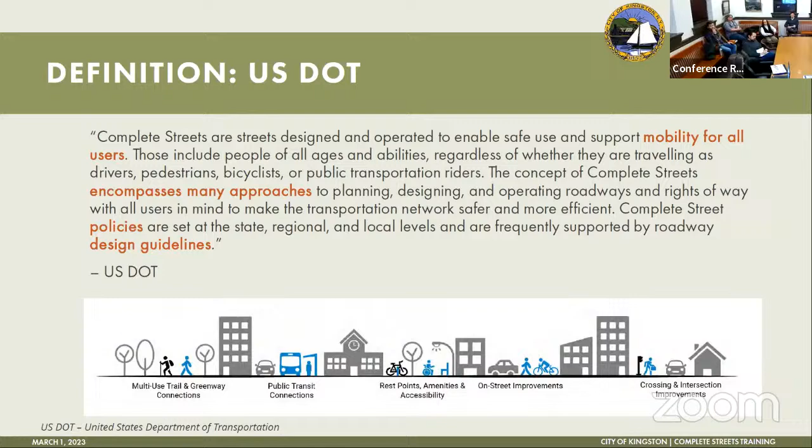Another definition is the Smart Growth America, which really coined the term complete street. So again, very similar to the US DOT's, but I just want to make sure we're all on the same page of how we are defining this. So complete streets is an approach to planning, designing, and building streets that enables safe access for all users, including pedestrians, bicyclists, motorists, and transit riders of all ages and abilities.

This approach also emphasizes the needs of those who have experienced systemic underinvestment, or those whose needs have not been met through a traditional transportation approach, such as older adults, people living with disabilities, people who don't have access to vehicles, and Black, Native, and Hispanic or Latino communities.

And they also go on further to define what an incomplete street is, which is the result of a process that fails to consider the needs of all people and outdated measures of what makes a street successful. And in terms of all people, it considers the needs across the entire spectrum of demographics, age, sex, etc., mobility levels, and mode of transportation.

So again, the image that we're seeing is just a traditional street. And as this presentation unfolds, it's how do we redefine basically that edge of pavement situation to accommodate more than just cars, more than just vehicles. So again, looking at traditionally, we're looking at the roadway in this image, where the car and the bus are shown. That's typically what we looked at of how to get people around. So how do we transform that to look at all users?

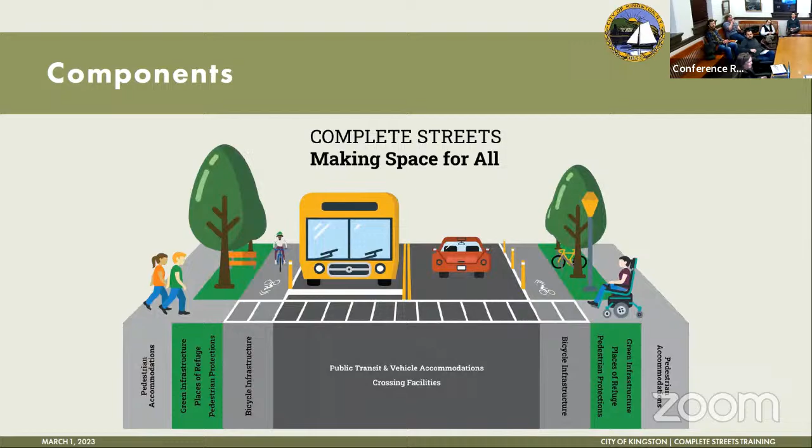The overlapping uses is where the conflict arises. And getting any sort of accidents or fatalities down to the minimum or to zero is obviously the goal. And so what can we do to make these changes in design for all users?

So the individual components for complete streets, in terms of pedestrian accommodations, we're looking to provide sidewalks and/or multi-use paths for pedestrians. We're looking to provide curb ramps that allow them to go from the elevation of a sidewalk down to cross at roadway level to then back up to the sidewalk. And then crosswalks and crossing signals for pedestrians to get across where vehicles are driving.

For bicycles, we're looking at, again, bike lanes. Whether it's on road, or separating them and having them off road on a shared use path, and/or separated by a buffer on the actual roadway where the vehicles are traveling. That could be, again, bike lanes, which are single one-way traffic on either side of the street, or a cycle track, which is two-way traffic on one side of the street.

Vehicles themselves is looking at traffic calming techniques, narrowing the travel lanes, looking at providing bus lanes and bus stops and bus loading zones for public transportation, looking at on-street parking and flexible curb space for vehicles, and then again, looking at possible road diets and reducing the number of vehicle travel lanes.

So a lot of understanding what complete streets work for on any given street or situation. Traffic studies are required to understand how the roads are currently being used by vehicles, and is it possible to reduce a lane. So these are not just solutions that you can just overlay onto any roadway. There's a lot of understanding how the roads are currently being used and what the additional desired uses are.

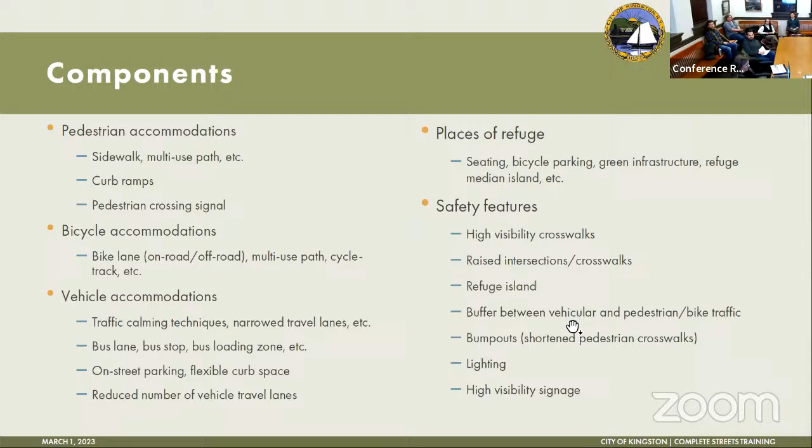So the question is, why complete streets? Why can't we just go on as we are? Bikes can use the roads with cars. People can walk as they want to. But as we've seen every year, people are wanting to walk more. They're wanting to commute more. COVID really increased this a lot as well. People were out more and trying to walk and get places.

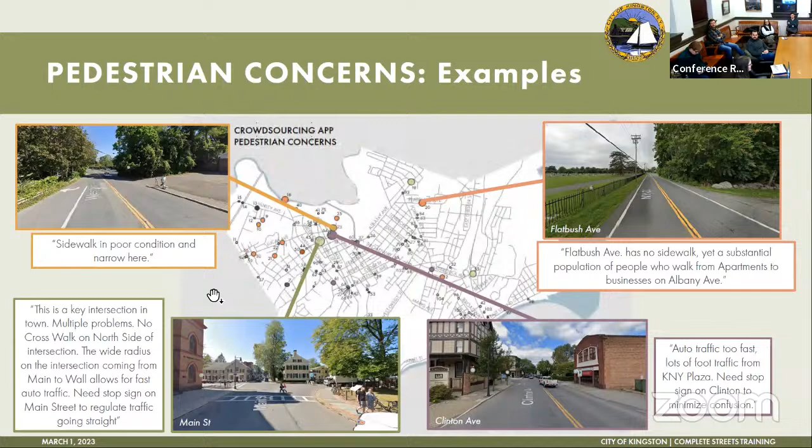And then looking at the bicycle concerns, again, you can see that they are really scattered all throughout the city. The larger size of the dot means there are more votes or comments on any given area. And as you can see, it's just the perceptions, and people are putting out their words of what it feels like to bike in Kingston.

Some anecdotal specific concerns were noted on Washington Ave: consider aligning the intersection and signalizing, considering the trail and potential to complete the trail to Plaza and Midtown Linear Park. Also on Washington Ave, 2 lanes of traffic and lack of shoulder make this section difficult for cycling.

On Albany Ave, the sewer grates, as you can see in this photo, in line of travel and shoulder, are difficult to avoid on a bicycle when being overtaken by 2 lanes of traffic.

On Schwenk Drive, the road is too big and fast for what it supports. Consider dieting the road, with on-street parking with extra capacity. As you can see, even just the residents of Kingston already understand the language of complete streets and the terminology of understanding what they'd like to see within Kingston.

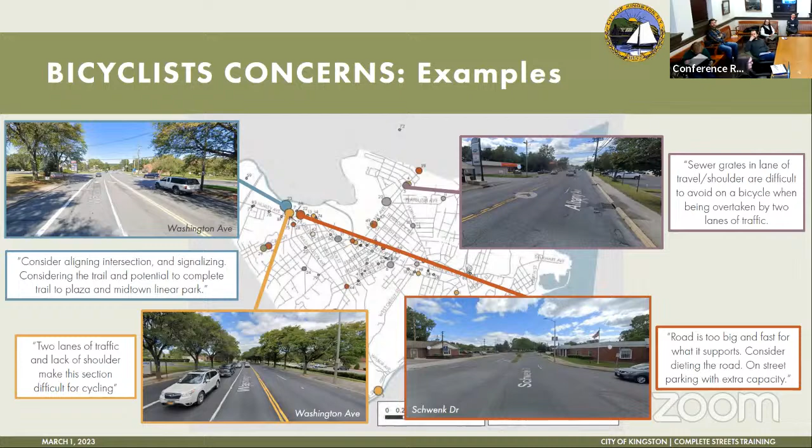The benefits of complete streets really speak to everything we've already been talking about: the more we can separate these overlapping uses, it leads to a reduction in motor vehicle related crashes and a reduction of pedestrian risk while walking around the city. In addition, it reduces the bicyclist risk when well-designed bike infrastructure is included, to the greatest extent possible, separating it from vehicular traffic.

And then really promoting walking and biking—like a field of dreams, build it and they will come. Good sidewalks, good bike lanes is going to increase people walking and biking. So 43% of people reporting a place to walk were significantly more likely to meet regular physical activity recommendations.

Kingston is not alone. Right now, over 1,600 cities across the US, counties, and regional planning agencies have adopted a formal complete streets policy. So this is what a lot of communities are trying to do to support the multiple uses on their roadways.

So now how does a community make this happen? The New York State DOT identifies 4 best practices that can be implemented in projects to support the complete streets principle that we've been talking about. These best practices were identified through stakeholder feedback.

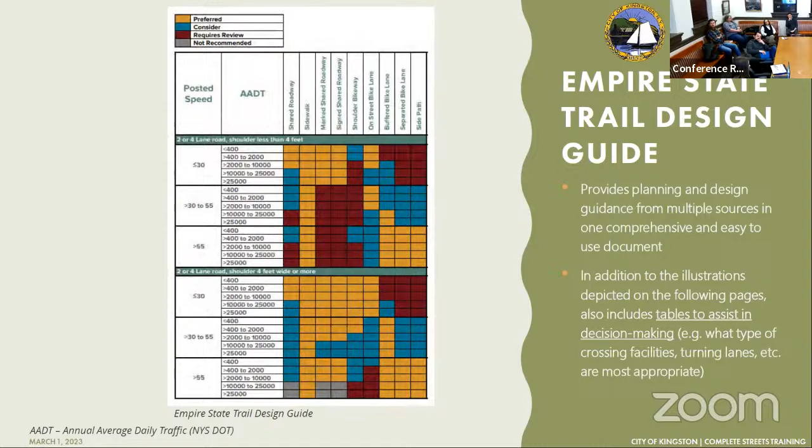This is the Empire State Trail Design Guide, looking at annual average daily traffic. This again goes into the type of road we're looking at and what the posted speed limit is. Then you can look at what they're recommending with respect to a shared roadway or a sidewalk. All these guidelines are out there, and you could look at any given street within Kingston and refer to these design guides to see what is recommended and what the possibilities are to help with decision making.

These are just some slides from the Empire State Trail Design Guide to help you understand all these different conditions. There's not one solution that fits everything. You can see these are recommended only for low traffic residential areas, because our goal is to separate bike and car usage—but if it's a rarely traveled road, maybe there's an opportunity if there isn't enough room to actually separate the uses. It allows that to happen on corridors with very low traffic.

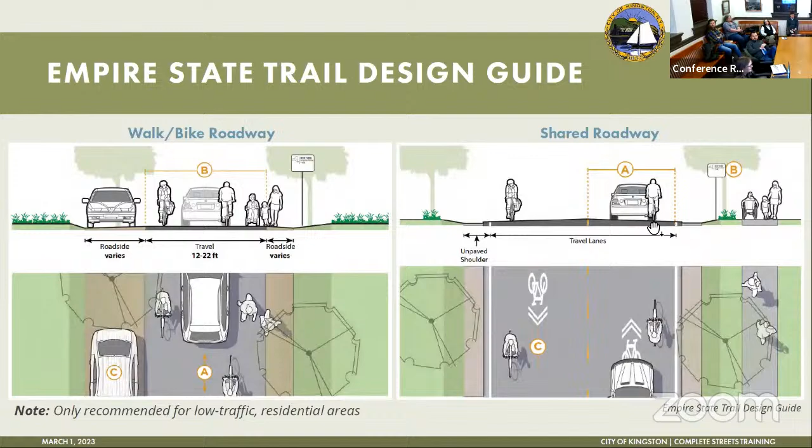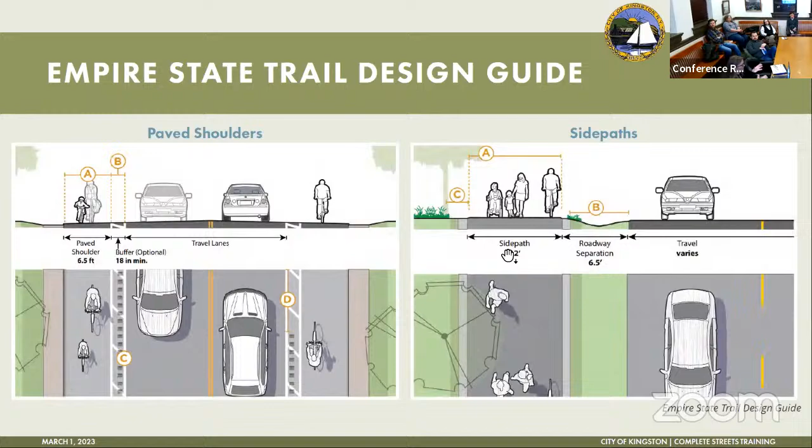A shared roadway isn't the starting point, but depending on the traffic, it is an option. Paved shoulders are another option—can we start getting a buffer, can we start separating the uses? Looking at side paths if we have that opportunity. Again, these design guides take you through and let you look at the widths and how to lay things out.

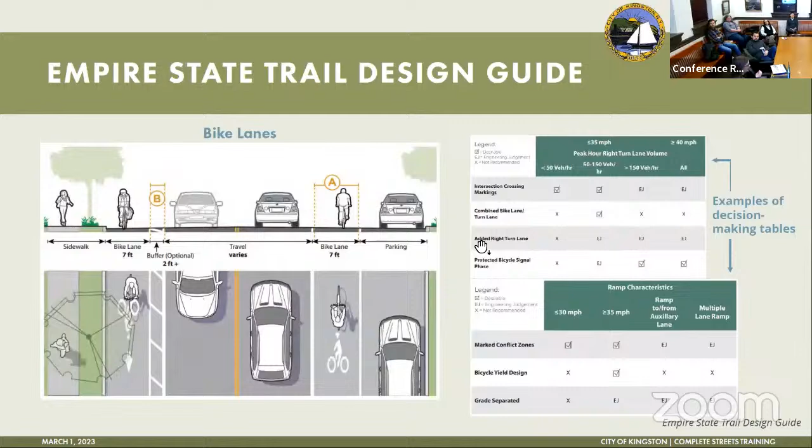Same thing here—all these charts showing peak hour right turn volume, looking at the breakdown of specific roads, because every road in Kingston isn't going to have the same recommended way to get bike traffic and pedestrian traffic on it. On-street parking might be something that's required. So again, all these different things are laid out for you—you don't have to reinvent it, just figure out what the options are.

This is looking again at bike lanes, single direction on either side of the roadway, where the bike lane travels in the same direction as the car with a separation of at least 3 feet. Or do you do a two-way cycle track that's separated from the vehicles, where the bikes all travel together but the pedestrians are separate from the bicycles?

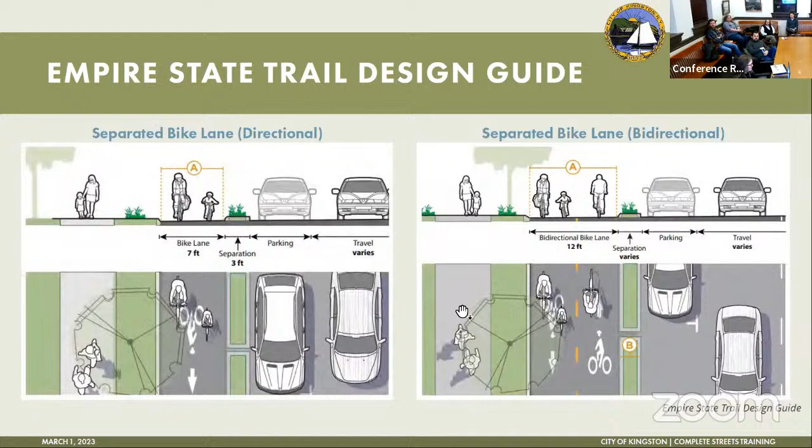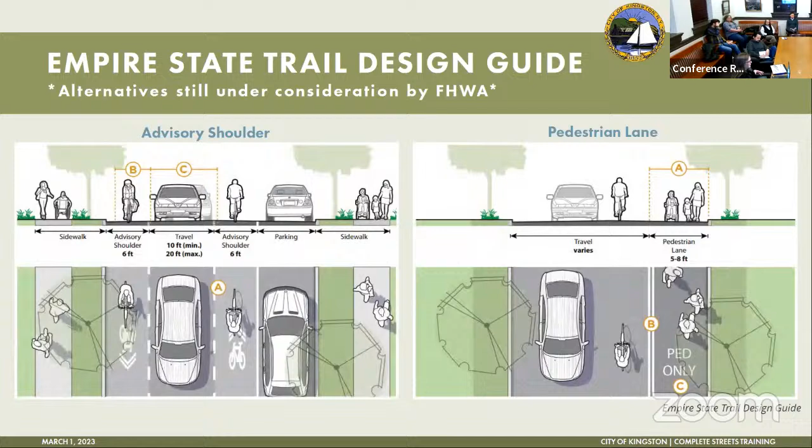Just a couple more alternatives that are currently being considered—these haven't been approved yet, but people are always continuing to think about how best to design this. Unique situations keep coming up, and a solution that's already out there might not work, so the question becomes what's another solution that could work and make things safer.

So let's look at some case studies now, just to make it more specific, and we'll start with some in Kingston, which I'm assuming most of you are familiar with. This is Hurley Ave, which was completed in 2020. The bottom left shows what the conditions used to be, and this is what the current conditions are after incorporating bike lanes.

The starting place on all of these complete streets designs is really looking at the existing pavement width. Anytime you remove or replace a curb, the costs increase a lot. So the starting place is always what can I do curb to curb, and what are my options? Can I get bike lanes in? There are times where, of course, you're going to have to take up a curb and widen things as needed, but the starting place is what can we do with what we have, and restriping is what we'll be focusing on.

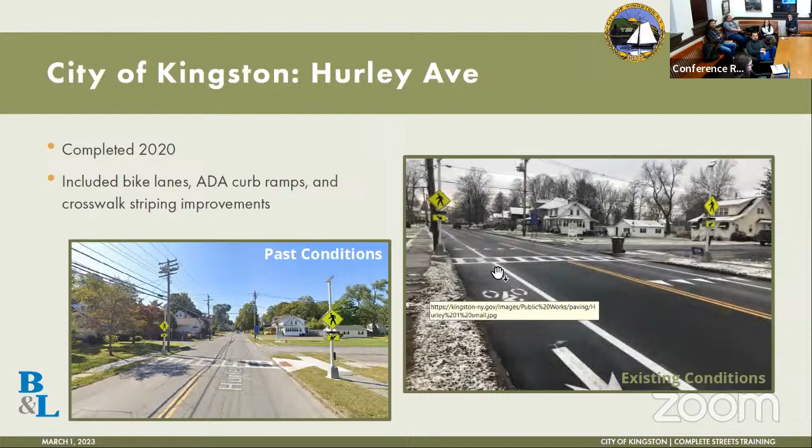Keeping the curb lines as they were, we're able to restripe and get bike lanes in by reducing the travel lane widths of Hurley Ave. This has the pedestrian crossing, a mid-block crossing, which is something enforcement and education is huge on because it's not at an intersection, and getting drivers to understand that a pedestrian in a crosswalk takes precedent. As you can see, the sidewalks here remained existing and stayed, and new curb ramps came in just for the crossing.

This is Broadway, which continues to be developed. This section is St. James Street to Grand Street, which included new ADA compliant sidewalks, repaving of the road, which allowed reconfiguration of the lanes, adding in bike lanes. They synchronized traffic lights, added new signage, incorporated green infrastructure, benches, trash and recycling cans, bike racks, and parking kiosks.

Synchronizing traffic lights is also another component of complete streets to assist with those overlapping areas and intersections, ensuring safe, enough time for pedestrians to cross safely, and enough understanding of how bicyclists will be getting through an intersection.

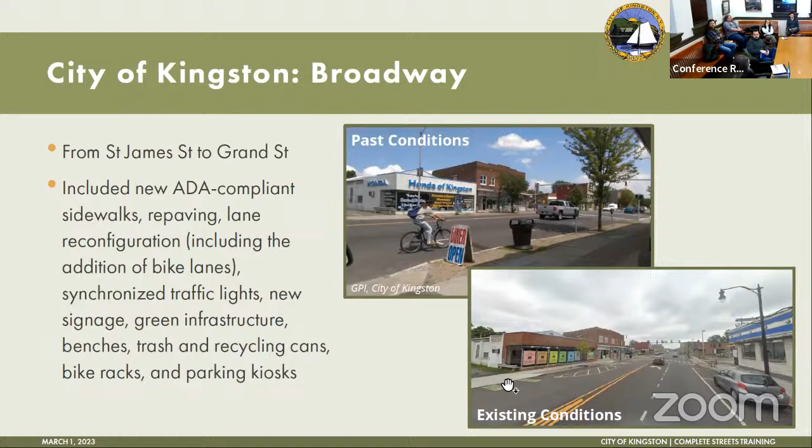With a cycle track, when the flow of bike traffic is on one side of the street, you do need to incorporate signage for the bicyclists so that they are stopping at intersections as well and following the same rules of the law that the vehicles are.

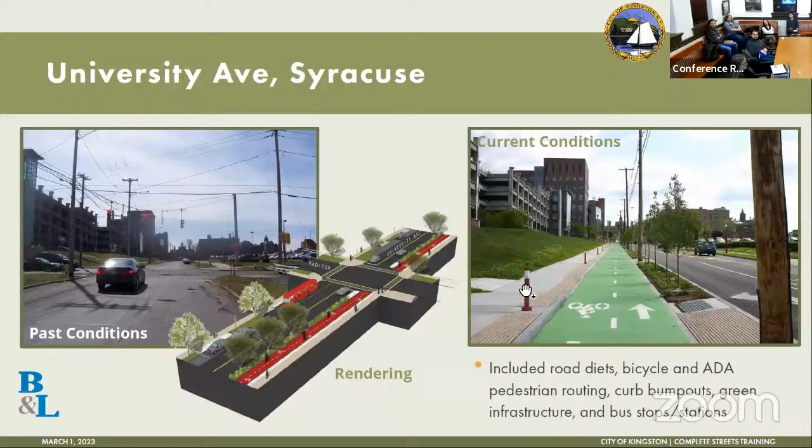Another thing to note here is for buffers, there are multiple ways to do that. This is a planted buffer, but also where there's just pavement, there's a change in the pavement texture so people are aware underfoot that things are changing. Vertical bollards also provide a visual separation, a visual buffer for the separation of uses.

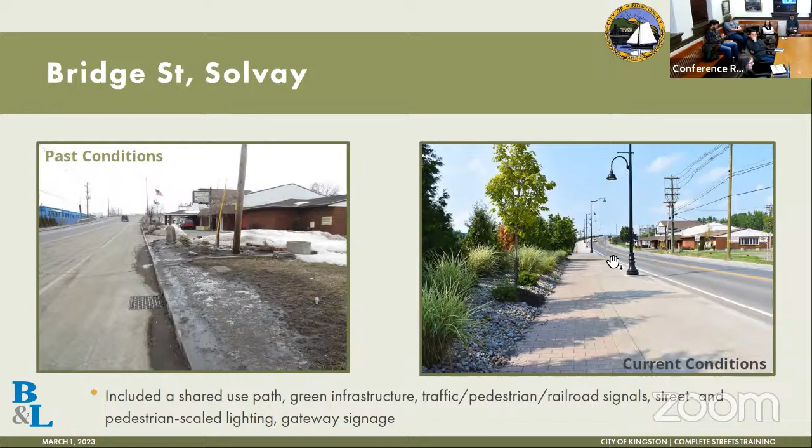Now we're looking at Kingston and the challenges Kingston faces trying to overlay complete streets on it. The first thing is bluestone sidewalks, which are beautiful and really speak to a defining characteristic of the city of Kingston. The challenge here is how do you maintain that balance of preserving community character with the bluestone sidewalks while still providing ADA accessible sidewalks.

If you've walked around Kingston, you know that the bluestone pavers do not all settle at the same time, and then all of a sudden you have these different elevations and bumps, which does not work for wheelchairs or people walking with canes and things like that. They're just a constant tripping hazard. But we also understand their importance in contributing to the historic character of these neighborhoods.

So there are a few potential solutions, and we're not proposing one over the other, just things the city is thinking of as they continue to develop, wanting to maintain this character of the bluestone sidewalks, but again, how to best do that, because accessibility is incredibly important as well.

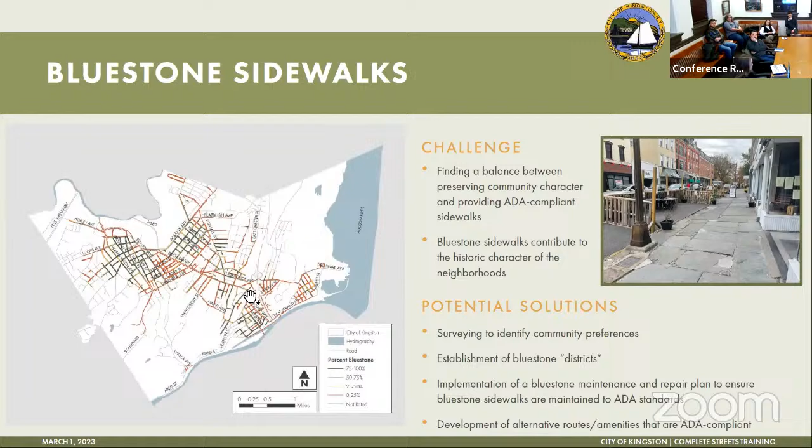Another factor that exists in Kingston is narrow right-of-ways. So I have been talking about the design, you look at curb to curb or the edge of pavement to edge of pavement, of what can we do. So the right-of-way is the city-owned property that sometimes extends beyond the pavement. On a city street, it's typically building face to building face, but on residential streets, it might extend beyond the edge of pavement into what looks like people's yards, but it's truly city property.

So the city currently does not have very large right-of-ways, which limits the amount that you can expand pavement on some of the more residential streets. So again, it's just like, what can you fit? So potential solutions to this, if it is an area where you do want to grab more right-of-way to expand the paved surface to accommodate people walking, biking, and driving: looking at easements or land acquisitions or land swaps with the property owners to expand the existing right-of-way.

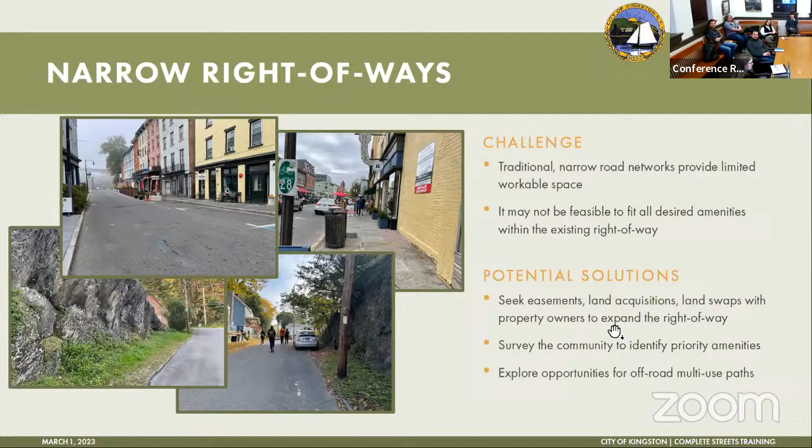So some potential solutions: looking at off-road multi-use paths, where you could possibly circumvent the steep slopes with switchbacks to maintain a more gradual slope. Looking at prioritizing implementation of places of refuge. So if we're walking up this steep slope, can we get some benches in there so we can take a break or park our bike? Because maybe we don't want to ride our bike up the steep hill. We want to bike to get downtown, but then walk the rest of the way. So allowing those different opportunities.

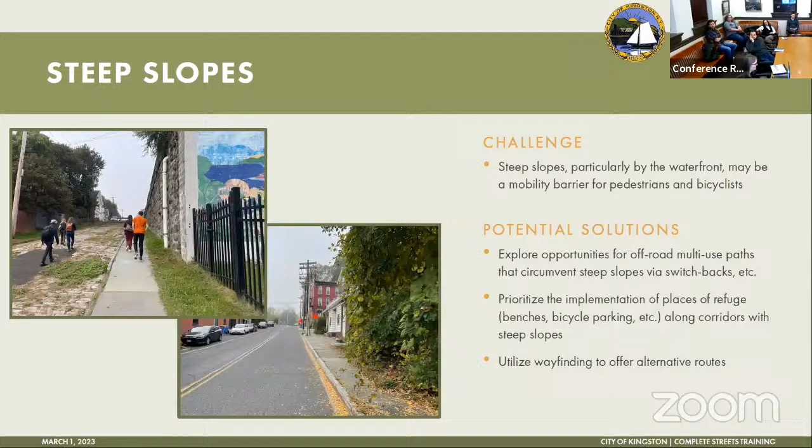And then utilizing wayfinding and signage. So if I'm at the bottom of this hill, maybe I didn't even know there's an off-road switchback so I don't have to go up the steep hill. So signage is always great to get users to understand the opportunities and what's offered throughout the city.

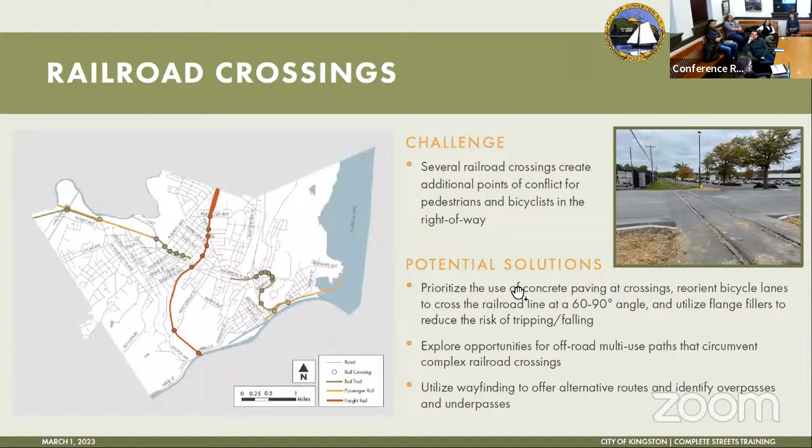So the solutions at railroad crossings are, to the greatest extent possible, orienting the bike lanes and pedestrian crossings at a 60 to 90-degree angle. That shortens their crossing path. And utilizing flange fillers to reduce the risk of tripping and falling on the rails themselves. Again, looking at off-road multi-use paths to avoid these crossings to the greatest extent possible. And again, wayfinding to let people know the safest way to get from point A to point B.

And again, education and enforcement. So I feel like we're repeating the same things, but these are the key factors of complete streets, and they're important, and their role sort of comes at it from different angles depending on what topic we're talking about or what specific aspect we're talking about.

So whenever you make a change to the roadway, whether it's changing it from 2 lanes to 1 lane, or just changing the striping or changing the turning lane, any of those changes just cause confusion to drivers. They're used to doing it one way. And so that change always takes time for them to adjust. And complete streets are only fully effective when the drivers are aware and follow the roadway rules.

So if we have those mid-block crossings, we've got the pedestrian crossing signals. They don't do us any good if the cars aren't going to stop for the pedestrians crossing in those crosswalks. So potential solutions, which we spoke to a little bit already, is utilizing temporary signage and flags to alert the drivers of the new roadway configurations.

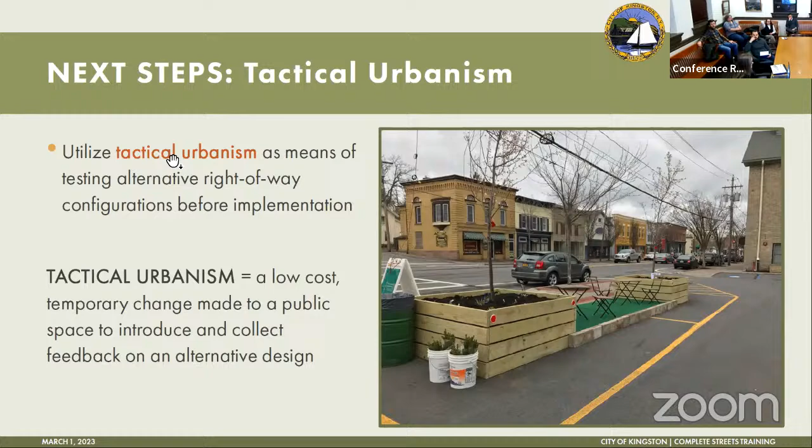And that can be everything from taking away parking lanes to adding in a temporary bike lane. Obviously, New York City did this a lot before they did the bike lanes. They did it temporarily, taking out parallel parking on stretches, and they tried it out for a summer, and then they ended up keeping it. But the original implementation of some of their bike lanes was originally temporary to see how it worked and how the parking situation would be impacted.

Funding, we have mentioned again, the many different levels at the federal level, state and regional level. New York State has great funding that comes out every year. Some things are every other year. And these funding opportunities are changing all the time. You have a grants department here at the city that, with all of these plans that speak to recommendations for complete streets and corridor intersection improvements, can continuously look at these documents and refer to the programs as they roll out. The federal programs are rolling out all the time, as are state and regional ones, and then private ones within Kingston themselves are always opportunities as well.

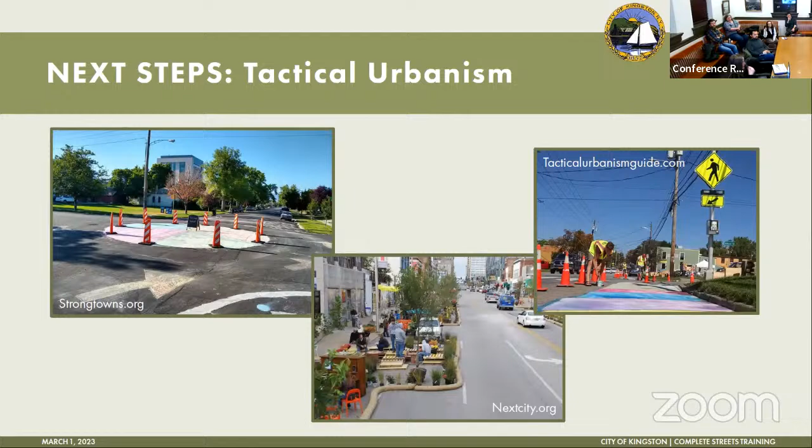And have you had any success where these have been put in place and then made permanent? Yeah, the Saratoga one was one they did for the summer, and then yes, they ended up going out and getting funding. They put it in temporarily for the summer and then went and got funding to get it implemented.

Actually in Hoboken and Jersey City, they are using tactical urbanism to really transform that city. They haven't had a fatality in four years, I think, which is really amazing. They're a bigger city than us, and they had more fatalities than us also. Tactical urbanism can be as simple as a planter put into a space to keep a driver from making a sharp turn, forcing them to slow down, or it can be very elaborate things like taking over whole lanes. I just want to stress that whole cities have really been transformed by these small projects. So it's important to get grant funding, but we really need to focus on the low hanging fruit, also like reducing our speed limits and doing things like that.

Can I ask, I know that's not something you can specifically address, but what is your agency's feeling on doing things like lowering speed limits, for example?

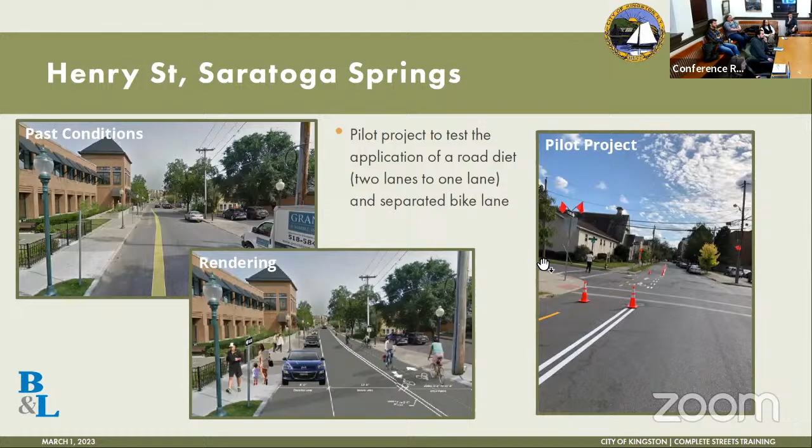The 311 system, yeah, there's not much room for flexibility to make changes to it. It doesn't appear that way. I don't know if that's true. I think it was designed more to collect information on things identified as problems - traffic lights out, the pedestrian signal twisted around facing the wrong way, that kind of stuff, we go out and fix.

But I feel like a lot of this, we have data, right? But it's all dependent on the level of participation. Like you brought up a comment earlier about the pool of data we're working with - we have information, but how do we know if it's representative of the community, right?

Like what the level of participation is. I feel like a lot of this is dependent on that, to implement the right solutions. I think I agree with you.

I think one of the hardest things with public engagement and public input is we don't have control of who is answering us, and we do our best to reach out, and we did many different avenues of it. It's interesting, and we haven't talked about this, is there a way to do that sort of public outreach on a repeating cycle, almost in real time, as things change, instead of having to wait.

For another project or another planning study to happen, is there a way, because the 311, to your point, is just more of a report type service. When we gathered data, it was not all negative, we got what is working as well, and having that sort of gathering feedback I do think would be very interesting and crucial. I'm wondering if it happens once a year or something like that, maybe then people get into the habit and the number of voices expands and you're getting a full range. I don't know, it's something interesting to look at that I haven't implemented in the past, but I do like that concept.

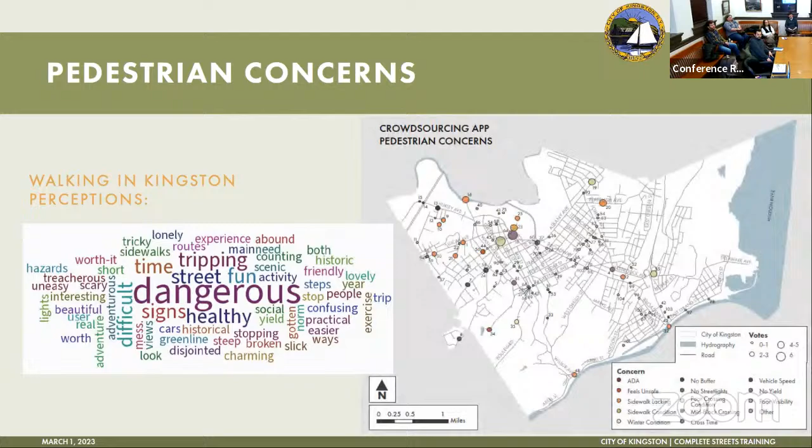Maybe we'll talk about this at the bigger presentation, but I was wondering if you incorporate design speed at all, like if you're thinking about targeting a certain speed for the cars in this design. All the design manuals that I mentioned, that's the design standards and the width of the travel lane for vehicles.

The width of the travel lane for the vehicles is dependent on the speed of the car. I don't know, Brian, if you can speak more to exactly that, because all these roads are classified and there are different speed limits with different roadway classifications. The width of the vehicular travel lane is defined by that speed, and then the width of the buffer between bicyclists and the cars, everything is defined by the speed.

And then there's that opportunity to possibly change a classification of a roadway to lower it. I don't know exactly, those are two separate subjects. The lowest we can go is 25 miles per hour, as most people know, with the exception of a school zone, which can go as low as 15 miles per hour in the city of Kingston, if the city were to want to lower its speed limit. But what Ella's talking about is design speeds.

You can have certain design elements like chicanes, speed tables, other types of physical elements that subconsciously or otherwise compel the motorist to drive slower. As you drive down a local street with street parking, children playing, trees, all those barriers have an effect on you to hopefully slow down because there are hazards. It's just an animalistic response we all have.

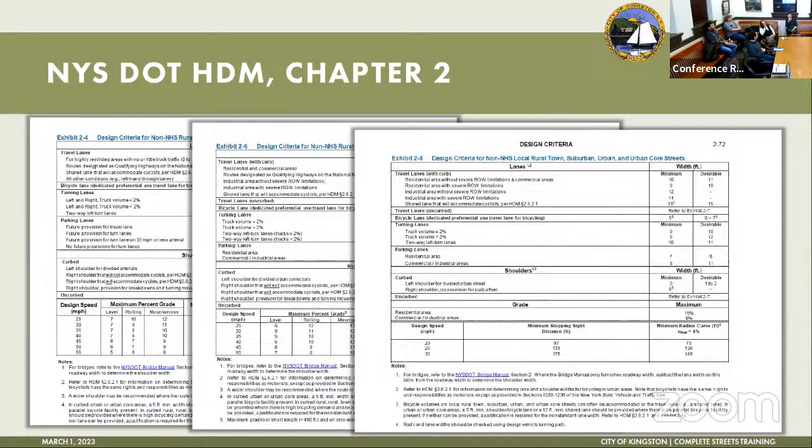You see them all over, on the side, still some. Yeah, but these ones in the city, I think they may have been similar funding. Yeah, I have heard that as well, that some of the bus shelters have been funded by a private entity, and they use the ad space. Yeah, because they all had ads on them already.

Actually, Tony Rozier might have some insight into that program—was there actual alignment from the placement to stops for UCAT, or was it just willy-nilly? Go back, the city bus system. And these still exist even though the city bus is gone? Wow, some of them, yeah—it's like relics. North Street, okay, I'll check one out, by the trolley museum.

I think this whole discussion speaks to the importance of full buy-in from the city and the city departments that are going to maintain it. Buy-in from the community too—again, just building it is not enough. If there's no plan to maintain it, there's no plan to have bus shelters in the bus route. It's not just about designing and building it, it's about having the full plan of who's going to maintain it and how it's going to function and operate. It's incredibly important.

You mentioned the Empire State Trail design guidelines. I thought that the Empire State Trail was all finished. How would that be implementable or usable?